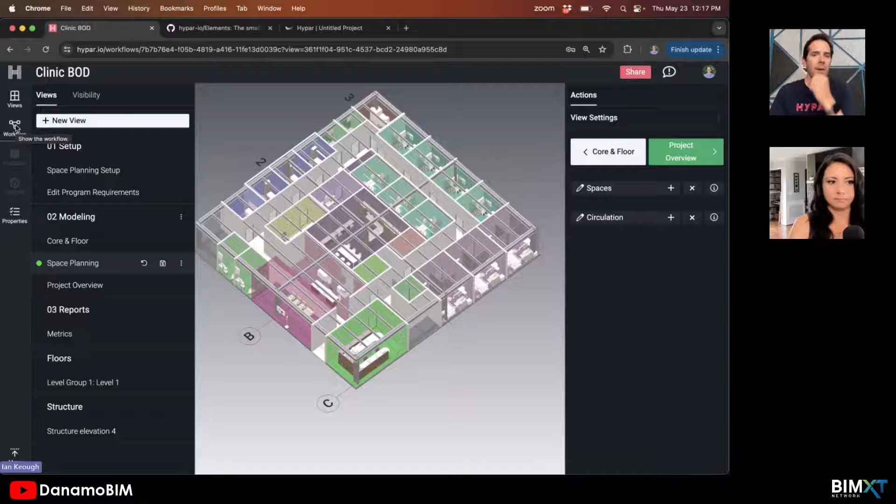I was just talking about the ability to make individual functions that represent systems in the thing. You'll note there's no visual programming at all. Although each of these is a system, you don't have to say this thing connects to that other thing—the system takes care of that for you. That's happening behind the scenes; we're orchestrating the connection between all these systems, but you don't have to wire things up in that way.

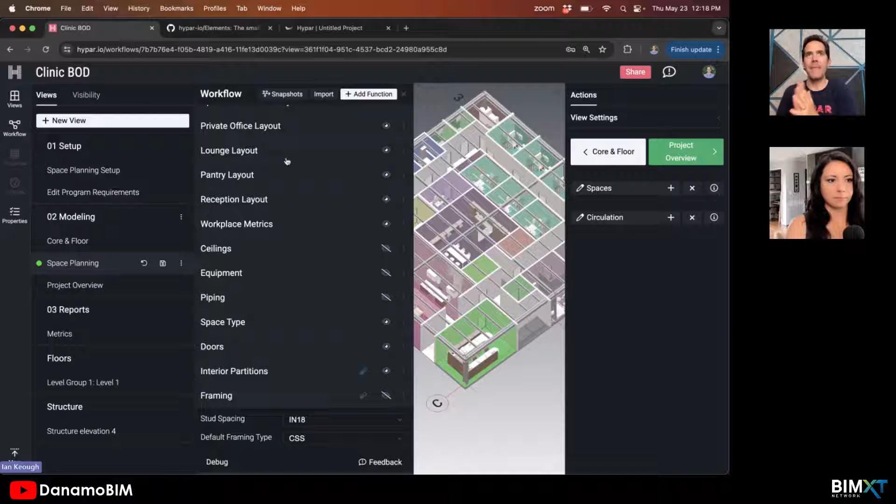There's a way that a function declares, 'I need some slabs,' and another function says, 'I make slabs.' So once I've made my slabs, you get to use my slabs. That talks a little bit about elements, and I'll get to elements in a second.

Those of you who have used, let me try and find a function that actually has some—those of you who have used Hypar are probably really familiar with this kind of interface. The simplification was: take all the stuff on the left side of your Dynamo graph, the inputs, and turn it into just a panel of inputs.

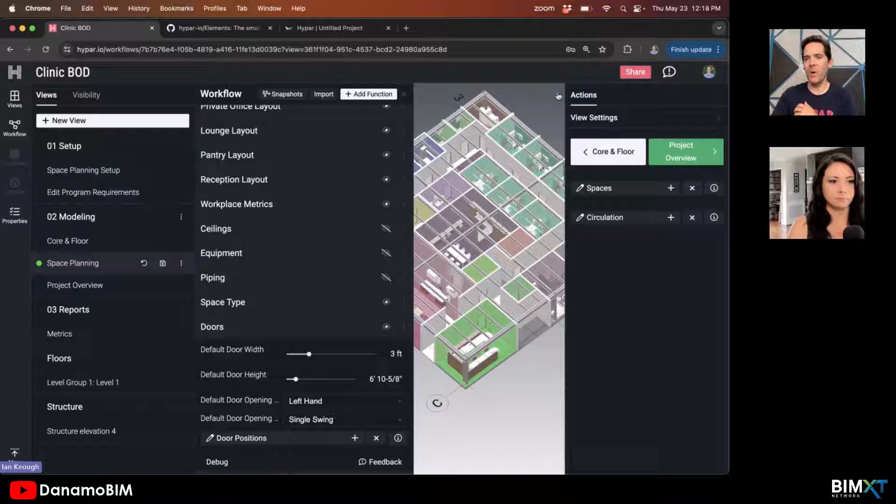But as soon as we built this, we thought to ourselves, there's going to be a lot of time spent over here in sliders and dropdowns while the model is over here. The thing people actually want to interact with is over here in 3D space. So for a few years while building this version of the platform, we were thinking about how to get more of this stuff off of these panels and into the building itself.

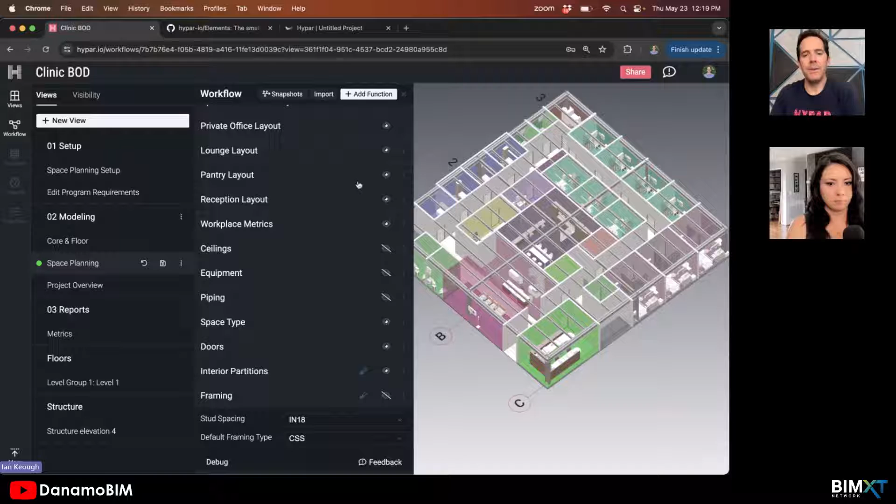This is basically a Hypar workflow. Behind the scenes in the cloud, it's spinning up whatever functions it needs to build a structure, lay out equipment in rooms, do space planning, and all these things. Over time, we started to move more and more of the core interactions out of these panels into the elements themselves.

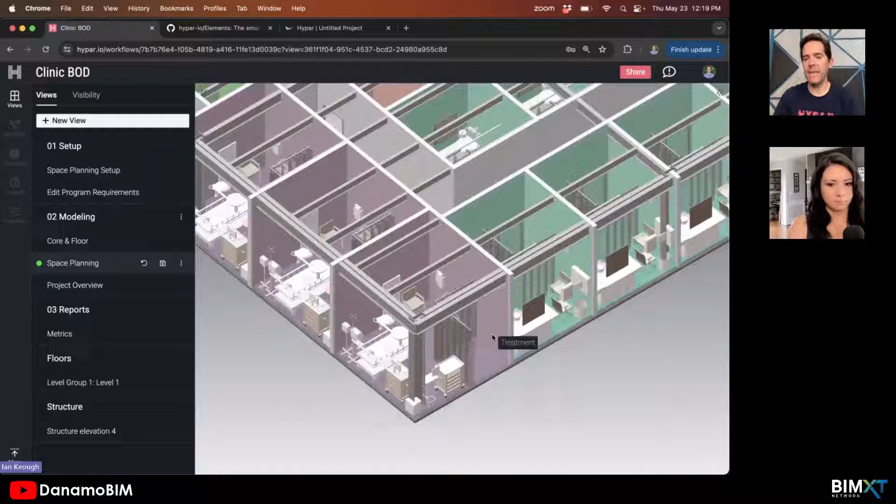This is a BIM, if you will, because it's actually generating BIM elements. But those things have modes you can put them in to do whatever is germane to what you need to do. In space planning, there's a space planning module—when you double click into this thing, it puts you into a mode where you can actually do space planning. Every time you save out of that mode, it tells the workflow, okay, we've saved some bit of this thing—go execute everything downstream and reconcile all that.

What these functions do is create elements. Elements have been core since the very beginning of Hypar, and probably even before that, to the idea of Hypar—we started thinking about this in Dynamo. If you've ever had a graph creating data in these tree structures, you think everything inside represents individual objects you care about with properties. There was a time we were trying to objectify things in Dynamo; we had some objectification nodes meant to turn things into these data objects.

Well, Hypar kind of starts there. Everything is an element, and as a builder in the system you can define your own elements. You can say, I want a new foo, and that foo has these properties. That foo then becomes a first-class citizen when a function creates it, manifests it, and puts it in the model—it's as good as anything else that's in the model.

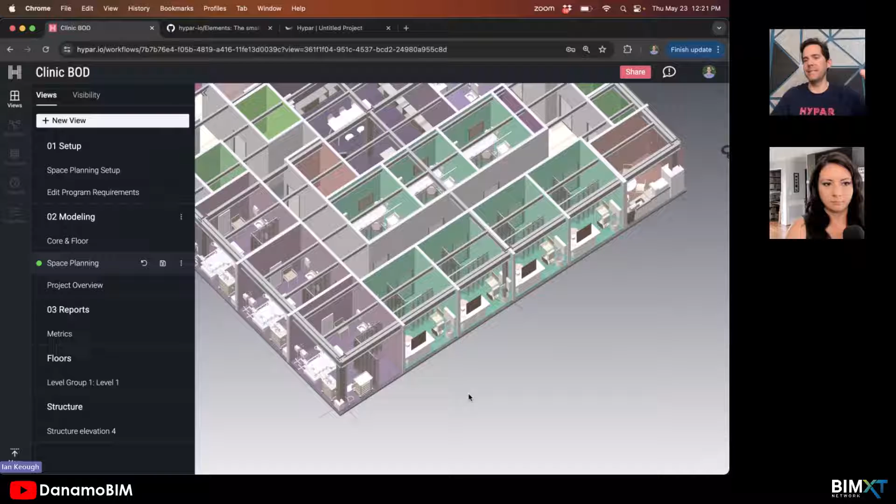That is to say, in Revit, there are things built into Revit, and things you build on top of it, but you don't have a level of access down into the native things. In Hypar, you have a level of access down into everything. These beams here are actually defined in a schema in Hypar somewhere that defines the element type for a beam.

So this is kind of Hypar 1.0. But we got to a point with this where we thought, still too much has to happen over here in this panel—it's still too complicated.

The interface is still too expert. This is Dana's interface. Like you could get in here and really make some wicked stuff. You'd know how to set this whole thing up. You'd know how to build workflows and everything else.

But as we started to build more of these workflows like space planning and stuff, we started to get a lot of feedback from users who were like, this really needs to be easier. Can you make this even easier? Don't make me think about functions or systems or anything else. How easy can this get?

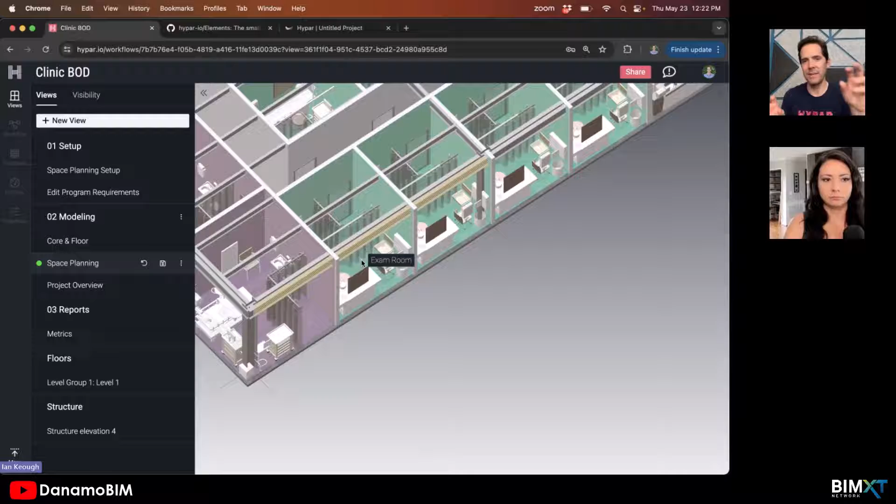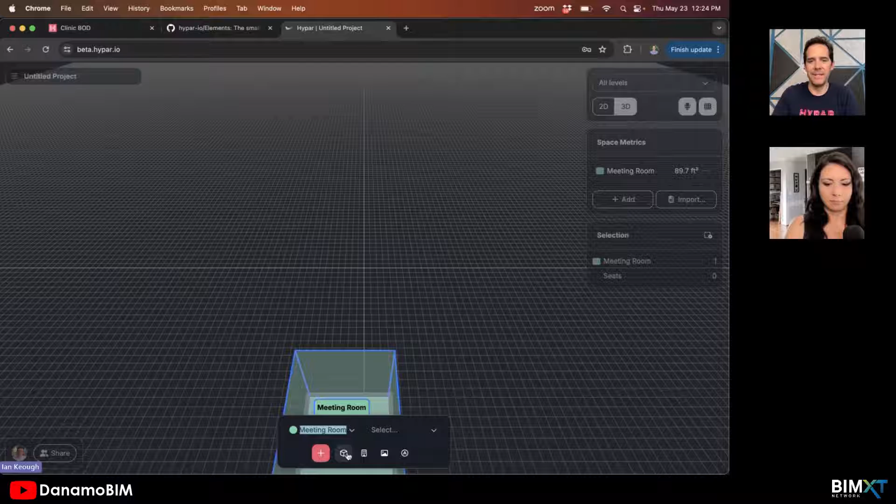That stuff is all still there, and the capability is still there. But it's orchestrating almost completely transparent to the user. What the user will experience is something that just feels like a modeling application. Just to give you an example, if you want to place a space, you click on this thing and you place a space. That's it. So now the concept of a space is actually an element.

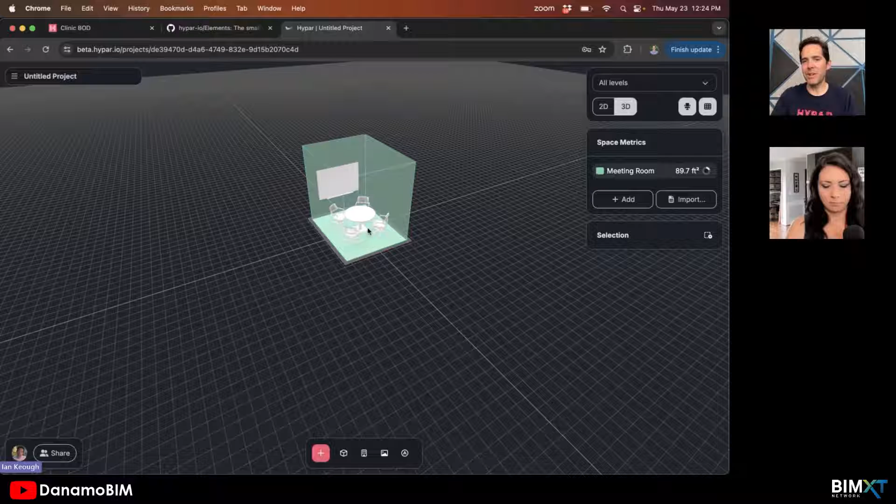Now there's other systems in here, like we saw in the last example, doing things like program requirements. So you start to see things coming up over here where you can define, well, I need 5 of these spaces and they each need to be 120 square feet or whatever. So this is calculating your metrics in real time. But when you want to think about how these elements become generative,

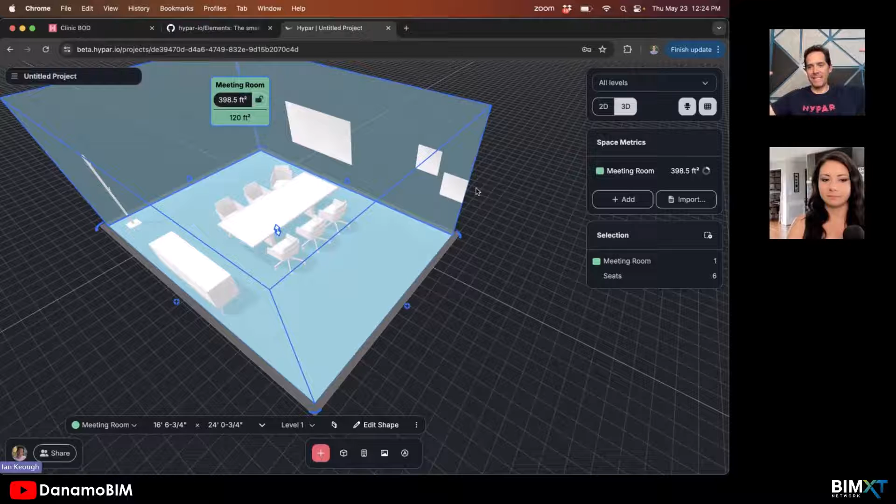if I were to take this space and change it into something else, that's when it actually executes the logic for laying out a space and gives you a new configuration. So somewhere in the cloud, a service spun up that has some generative logic for meeting rooms in it. It executed for this one configuration of a meeting room, and then it probably shut down. If I do a lot of these, it'll stay running and process all those requests. But you see that it develops a novel configuration every time I drop one of these in here.

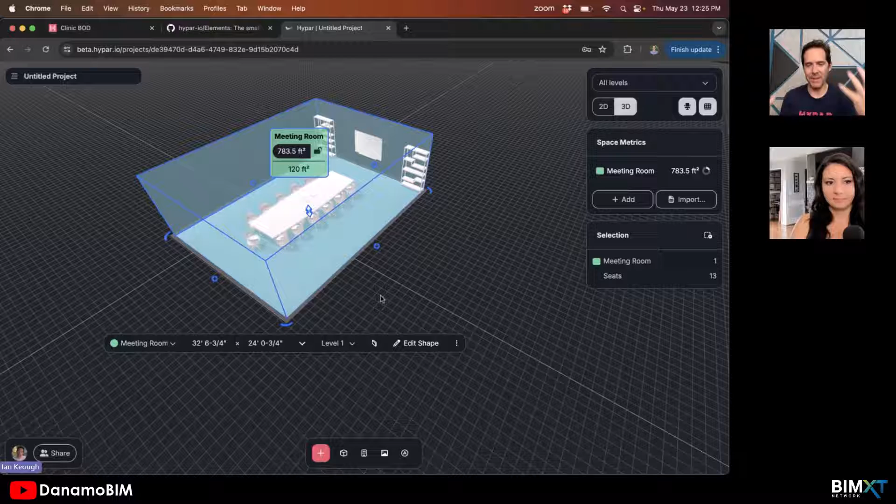So you get this direct interaction with a thing that you as an architect or a builder understand. It's an element that represents a space, that represents a meeting room. We're not using fancy language here, talking about scripts and functions and systems. It's just stuff that you know. And the interactions are super fast, and all of the interactivity happens down at the level of the thing.

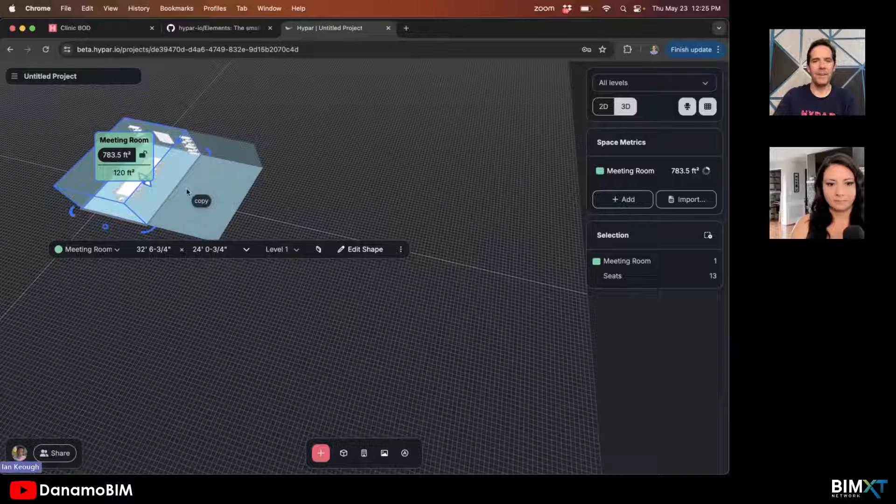If I want to satisfy my program over here that needs 5 of these things, I can just drag out 5 of these things, boom, boom, boom, in my building. And it'll tell me, well, now I'm actually over because I made 6 of them. So the interaction should be, where possible, on the element itself.

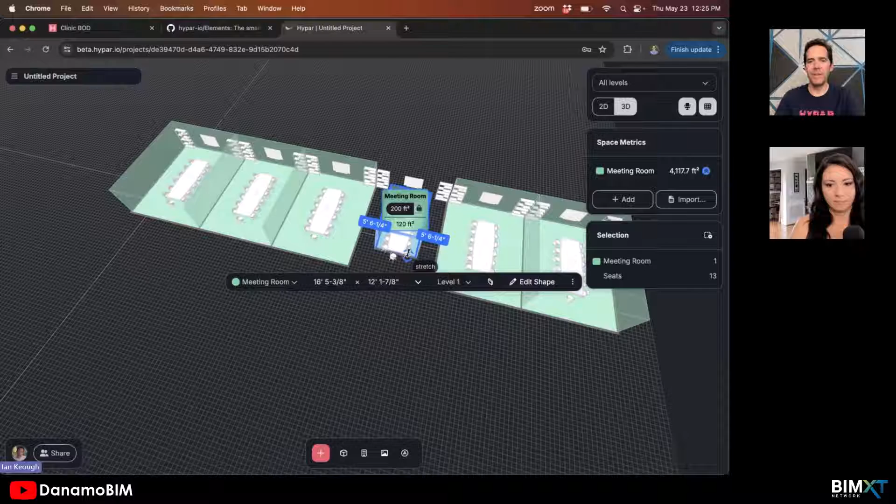You should have the ability to do things like, I want to lock this thing to be 200 square feet so that if I change it, it always stays 200 square feet, but it adjusts in one dimension. I probably created an invalid room, but, so, interaction first with elements. Meanwhile, all of this stuff is BIM.

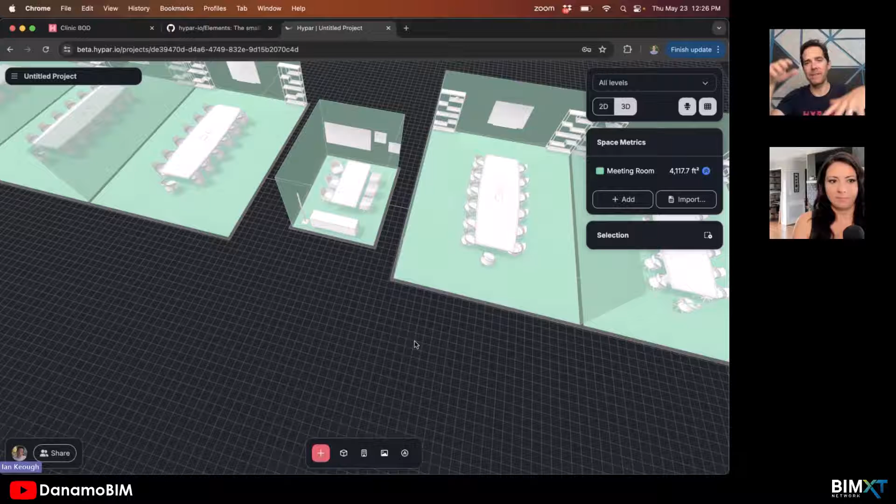We have a little add-in. You can go in Revit, you can say import from a project, and Hypar gives you a list of projects. All of this stuff is associated with family instances in Revit, and it'll bring in native Revit assets. So you don't get some junky thing. You get actual walls, actual spaces, actual room tags, actual furniture, just placed correctly. So it's a way to get to your BIM 1,000 times faster.

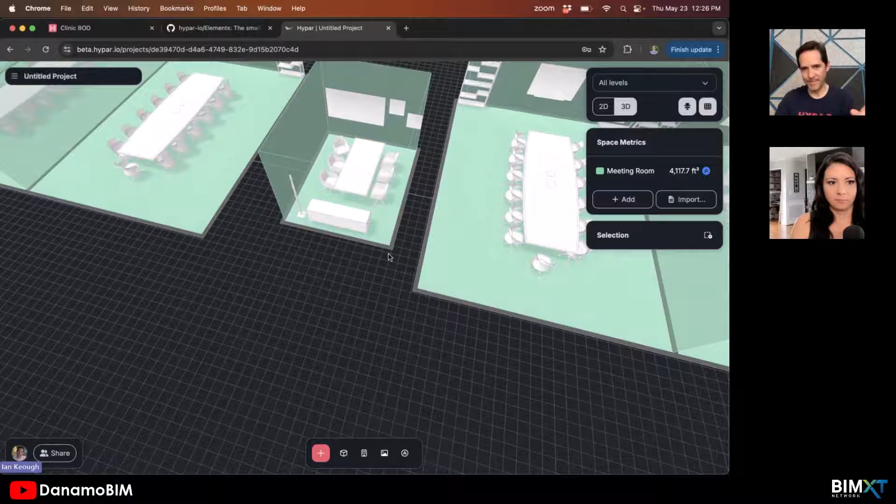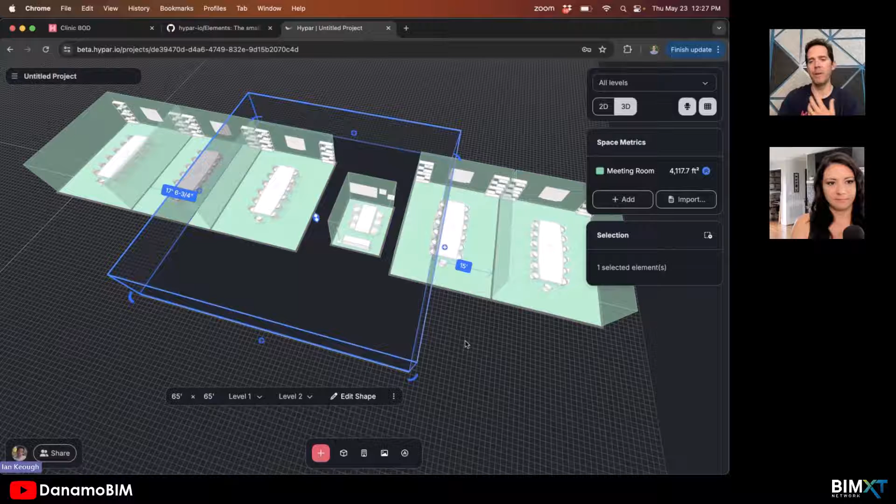One last thing I'll show, just to give you a sense of how the systems I was talking about before are running under the hood here. What will happen in Hypar 2.0 is that there are some types of sneaky things almost that we're going to do that are powered by that platform. So if you have a building element in your model, you can create this building element and you can say, I want to make this building 3 stories tall. Right, so it's super easy to just make this building element.

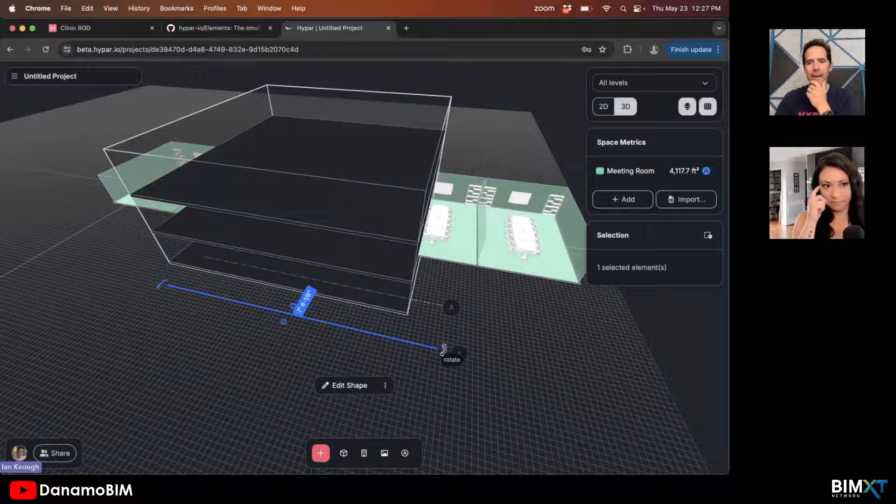Then you can do things like put a grid line in here, and let's put another grid line in here. And let's take this guy and rotate him. Now you have 2 grid lines that cross inside a building. You'll see that even before I place that grid line, it placed a column.

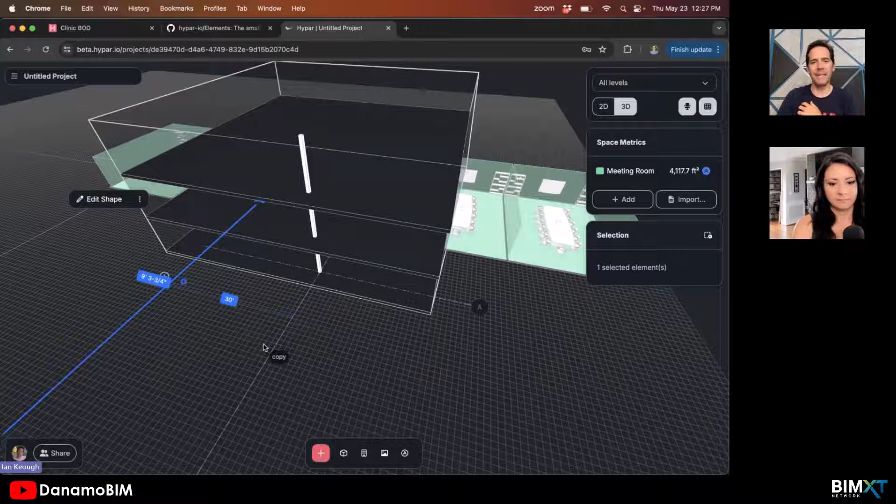Now, what's happening is that under the hood, there's a structural function executing again in the cloud that says, I found an intersection of these 2 things called grid lines. I'm going to execute because I'm the column function, and I'm going to put in a column. And this will happen for as many intersections as there are. And if you change the height of the building, it'll say, okay, the building envelope in which I'm operating has a couple of new floors, so I should re-execute and actually extend up through those floors.

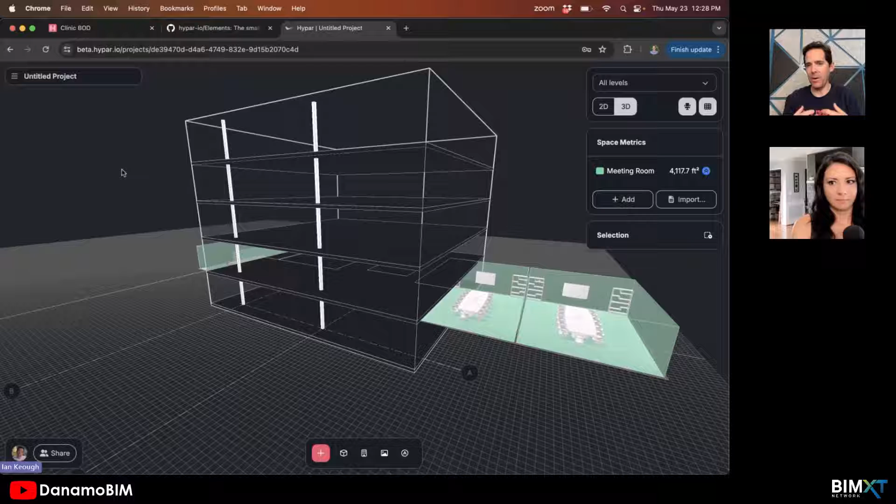And the user didn't actually have to say, I want columns. They said, I put a building and I put some grid lines in that building, and now the columns just kind of appeared. So there's going to be more and more of these kinds of natural interactions for architects and planners that are just giving them the affordance of doing the things that they'll already do in their planning, but all powered by this compute platform that encodes a lot of our expertise about how these things get laid out in the world. So that's a lot.

I talked a lot. I feel like I should be writing down my questions as they're coming, because there's so many that are automatically popping into my head. And I guess one of the first things would be, it seemed like you could create new functions to create new logic, right? So if I wanted to do additional things at a column grid line, I could potentially do those things, right? You're essentially just creating a front end to generate what you're referring to as functions, or really just the logic behind the task that's occurring.

You're exactly right. And if anybody in your audience has tried to write a function for Hypar 1.0, there's a couple things that you do. One thing is you say, here are the types of elements that I want to build with that function. And here's the logic that function is going to use to build that element. So you publish both of those things to Hypar, and then it knows about your element type, and it knows the logic that needs to execute when something happens in the scene.

So we don't have it exposed yet in Hypar 2.0, which, by the way, is all in beta right now. So nobody has access to this except people who are beta testing. But in the future, whereas in Hypar 1.0, when you built a function, you'd drop that function into the scene, in Hypar 2.0, you'll add an element type here. Your custom element type will show up in the add toolbar, and the functions that are required to generate that element type will be automatically added in the background, so that you as a user don't have to think, oh, I got to add this function that creates columns or beams or whatever. You'll just say, I want the beam thing in my project. And then again, your interaction will be all through those elements.

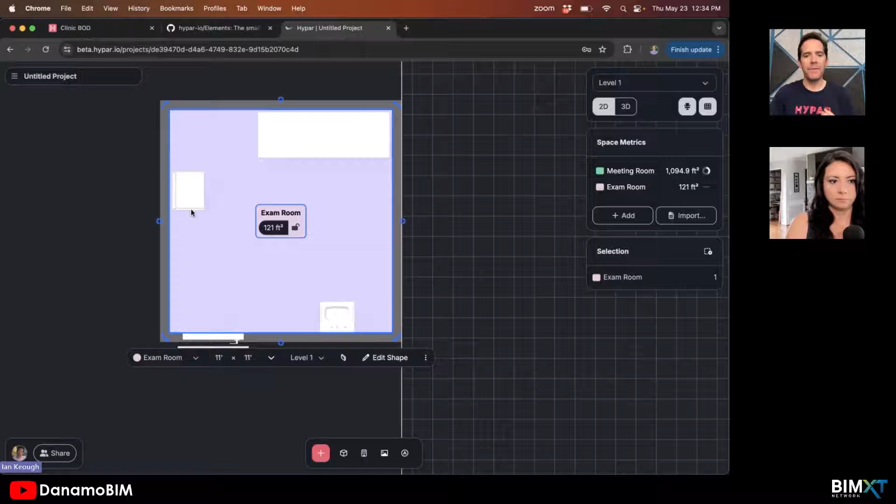And it's actually bringing in actual content from the actual VA model. And for some of these room types, I don't know if this one has it, there's also variants. So let me bring in a standard meeting room here. If I spell it correctly, we bring in a meeting room. Some of these also have variants, so you can switch between. And the way you do that is in this export mechanism from Revit. You can actually line up a bunch of these rooms, varied by type or varied by size.

Export them all at one go, and it will batch them all into one set of variants for that room type. Because the case for this is that typically there's an exam room type in a healthcare situation where it's some subdivision of the structural grid. It's a 12-foot room on a 24-foot grid, so there could be 2 in between column lines, as an example. Well, the 12-foot version of that room and the 12-foot 6-inch version of that room actually get laid out differently. The content gets laid out differently.

So you can lay these things out in Revit using the skills you already have, and then push these things down, and they show up as these drop-down lists of variants. That's static content. If you want the content to become dynamic, then you actually have to write some code.

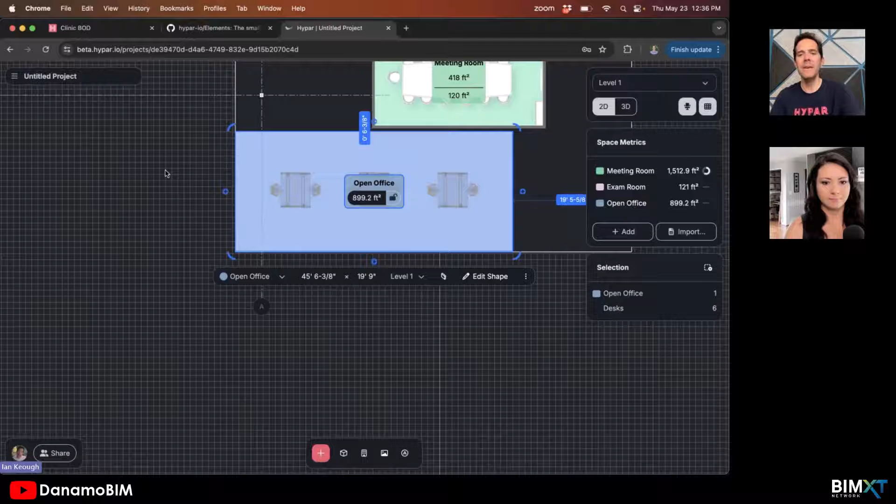So like, if I put in an open office and I just drop this guy in here, and this is one of our oldest dynamic space planning functions because Andrew Heumann's been working on this since we started doing space planning for offices a long time ago. There's actually logic that somebody has published to Hypar, which is the open office desk layout function.

So you would have to write some code, or in the future, maybe you don't have to write code, but you get code compiled for you from a description. Push that stuff to Hypar, and then say, every time an open office room appears in my scene, execute this logic. But again, the system takes care of most of that for you.

That's fantastic. And at some point, you mentioned it, right? These all equate to some sort of Revit element or Revit family type. So at some point, it does become an interoperability workflow, right? Like we're going for documentation purposes, if nothing else.

I would love to say that Hypar 2.0 is going to replace Revit from your workflow, but it's not. What it's going to do is be the springboard to getting to your BIM 100, 200, 300% faster. The challenge for anybody who's done space planning in Revit is that it's just not built for doing that. It's built for cutting plans and sections of fully modeled things.

And I mean, I've seen your workflows for dropping in from a program requirements document, like all the types that people need to build from. That interaction is so complicated, involves Dynamo scripts and the player running. And they're not very easy Dynamo scripts to manage, right?

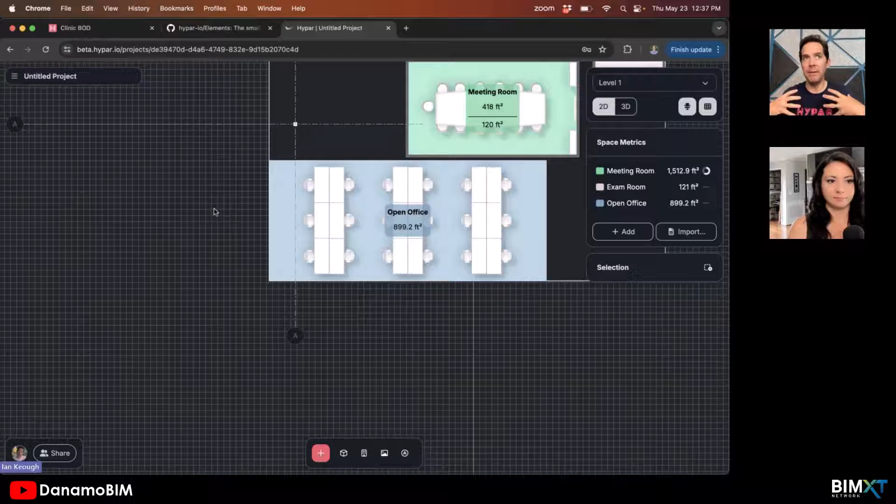So we feel like there's so much at the front end of the feasibility, concept, schematic, even into early DD process around planning and building your BIM that could be in part automated, with a fallback to just being able to treat this like any kind of BIM application and edit things as you want to edit them.

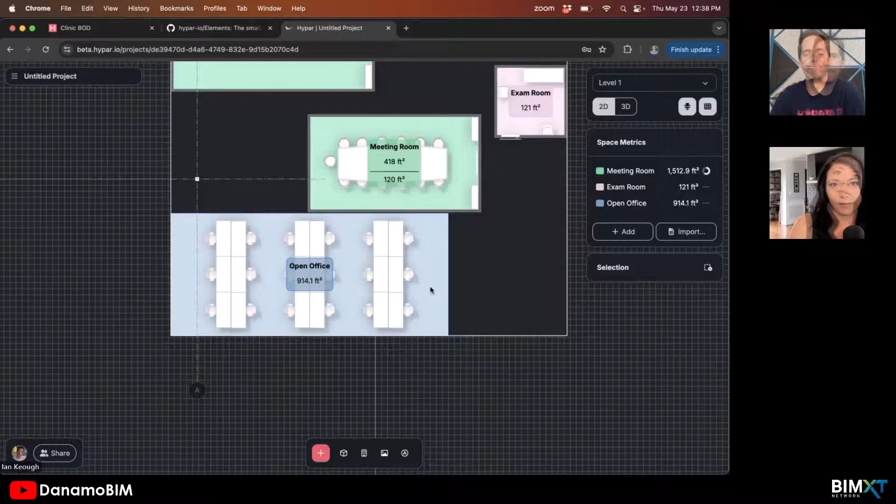Well, and it's interesting, and I must commend you, being the father of Dynamo, that at SmithGroup, most of the time we're utilizing Rhino or some other geometry-friendly and nimble software to form these crazy forms that you're seeing. It once again becomes an interoperability workflow of generating those adaptive components or what have you that we've made logic from in this more nimble program, right? We're doing a lot early on in a program that makes the most sense, whatever that is, and at some point translating over.

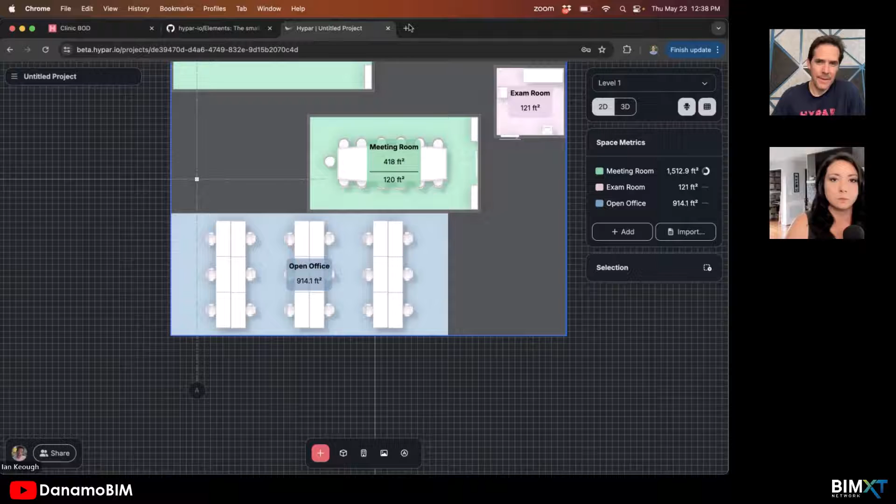And I would say that this is almost exactly that, right? We're taking space planning into a circumstance where it's much more nimble, it's much more user friendly. The functions, as you're calling them, are already set up and the logic is there for me to utilize. And then when I need to, push it back into Revit.

Yeah, and I think you're calling out geometry as one of these things. Man, that is one thing that we've been thinking about from the beginning. We have Andrew Heumann on our team, who's obviously one of the leading lights in the Rhino Grasshopper community. Super facile with writing Rhino code that can do anything for you.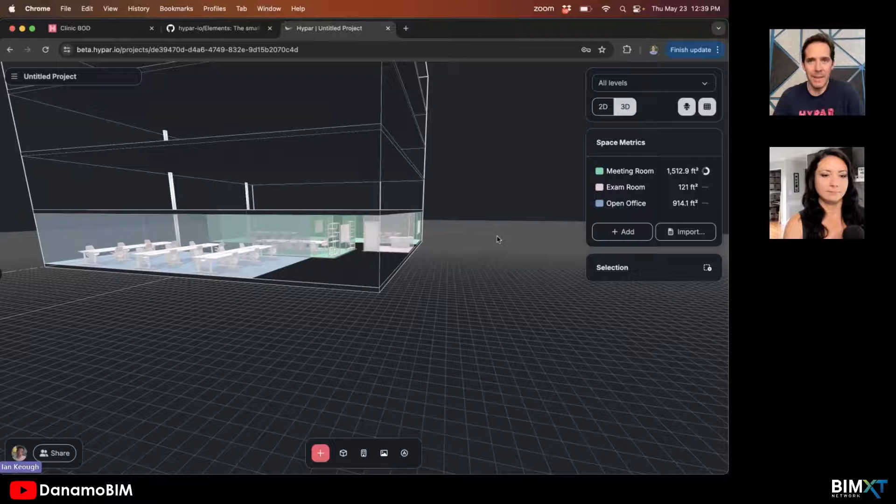And we've had to really be careful over the years of developing Hypar to not fall into the trap that I think a lot of architectural workflows have fallen into, to think we need to solve all the geometric problems. If Zaha Hadid's office can't build their building with my software, it's no good. I don't want to limit what people's expectations for Hypar should be, because your expectations should be limitless. But the fact is that 99% of all the buildings out there are not those buildings.

And so when we're working with customers on very large healthcare facilities, they might have one facade that's curved because it's a signature part of the architecture, and we will need to work to make it so that the layout along those facades is adaptive, and they spend the least amount of time possible jiggling boxes around, as they like to say. But certainly we shouldn't start from the place where we have to support all of that geometry and everything else.

But yes, if you are a firm that uses Rhino for conceptual design, we have to have the ability to bring in your core and shell and then provide that interface for people to be planning into. Because the other thing about all of this is that design is done in teams, right? Our planners who are planning in Hypar 2.0 are like, how do I collaborate with my teammates who are doing core and shell design in Revit?

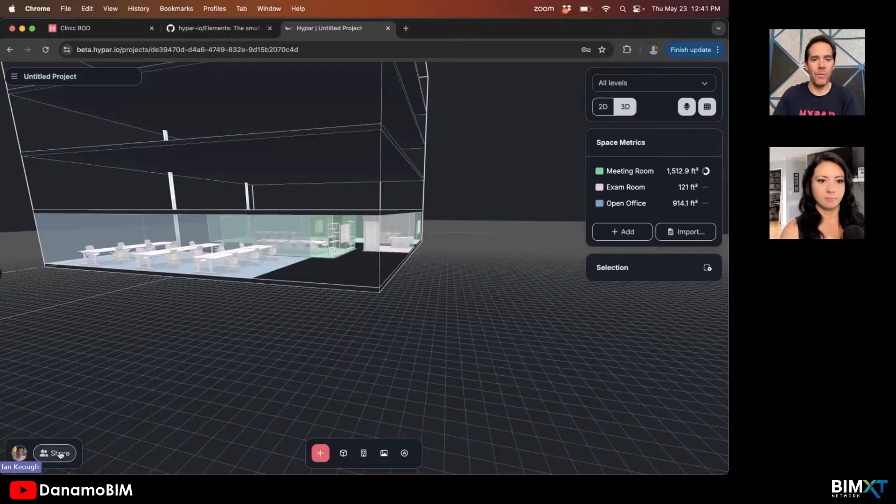And to them, we just say, well, start by sharing. Just share this workflow with your collaborators, let them get in here, and ultimately we're going to bring in their Revit context as well. So as they're updating their context, their context is visible in here, and you can plan up against it. And then ultimately they can pull your changes down into their Revit as well, so they can see your fully modeled out plan. So yeah, the aspect of sharing and collaboration and how the web unlocks that is a whole other conversation.

Well, once again, I must commend you. If you're the father of Dynamo, I'm one of your children, as DanamoBIM, right? Oh my gosh. And so, being that I am 100% pushing Dynamo and how to kind of sit on top of Revit and use Revit in a smarter way, as you've seen, building something completely outside of Revit just seems like almost an impossible feat. So hats off to you.

Well, thank you. But I will say, all of this is an evolution. Every day here we are talking as a team, not just about the intricacies of building a piece of software. We're talking about what is the next thing the industry needs. The industry adopting Revit as it was back in the day kind of needed Dynamo, kind of needed an automation solution that was for the everyman.